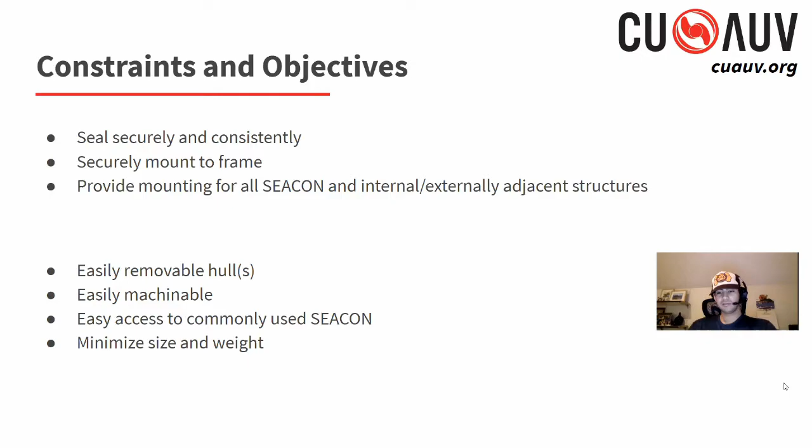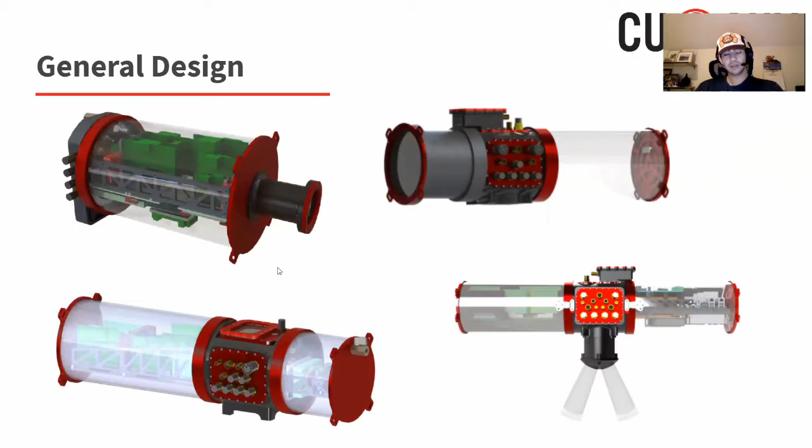And there's also these SEACON panels, which have those spots for the SEACON so the wires can branch off to various locations on the sub. In this iteration, there was a camera included. This one, the camera was also included, hence a clear end cap. But then you can see in these three, actually, the cantilevered racks and computers are here as well.

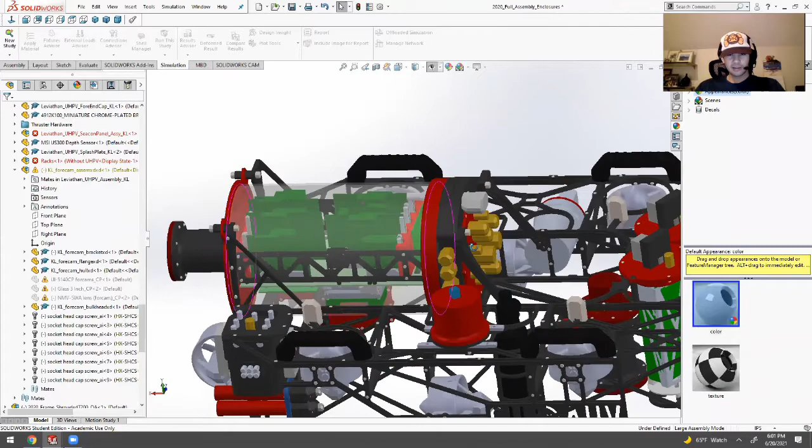So transitioning to CAD, I loaded up our most recent vehicle here. Let's see. So you can see the context in which this UHPV sits. So it's mounted in the back. These two tabs, kind of hard to see, but there's two things that brace from the back. Oh, I zoomed out.

You can see the SEACON panel here, pressure relief valve, cantilevered rack system. And then there's a camera here, and then there's these tabs which secure it in the front. And so this whole red portion is free to slide. The red and translucent portion is free to slide in and out and be mounted on these tabs. So the racks always stay in place on this back black part.

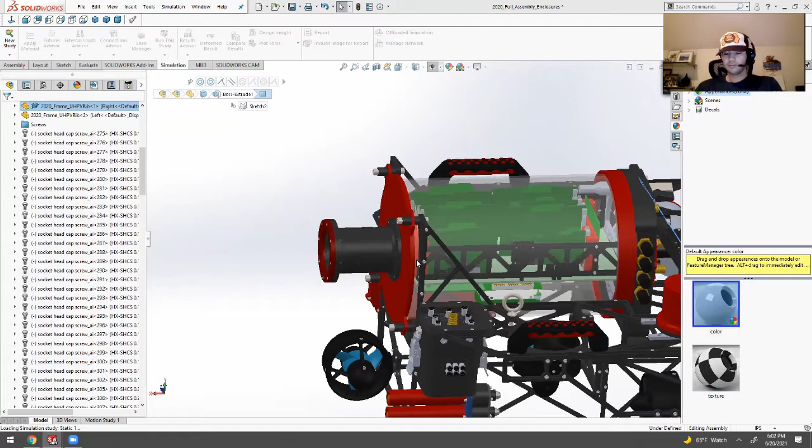So I can open up this one just to show more specifically what we've got. So we have, let's see. So here's the computer, here's the cantilevered rack portion, pressure relief valve, SEACON, call this the cap, collar, hull, end cap, and camera.

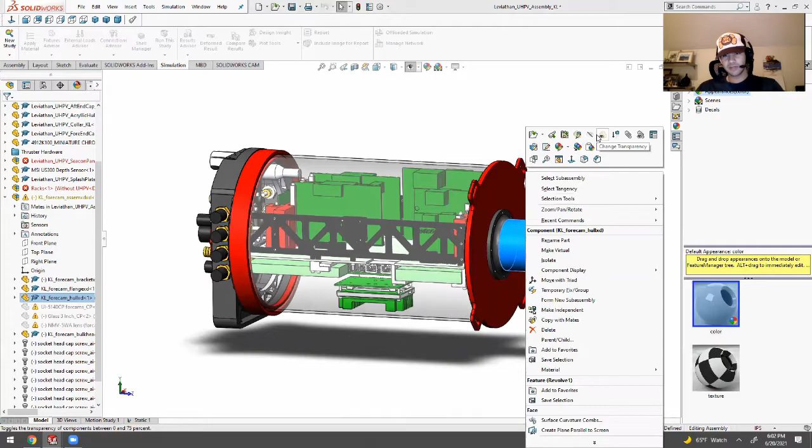You can see the camera in this iteration is mounted on a bracket. So the camera is not modeled right now, but there is a bracket that sticks out of here and it provides a mounting spot for the camera. So that means one less SEACON coming out of the side because the wire can go directly to the back plane.

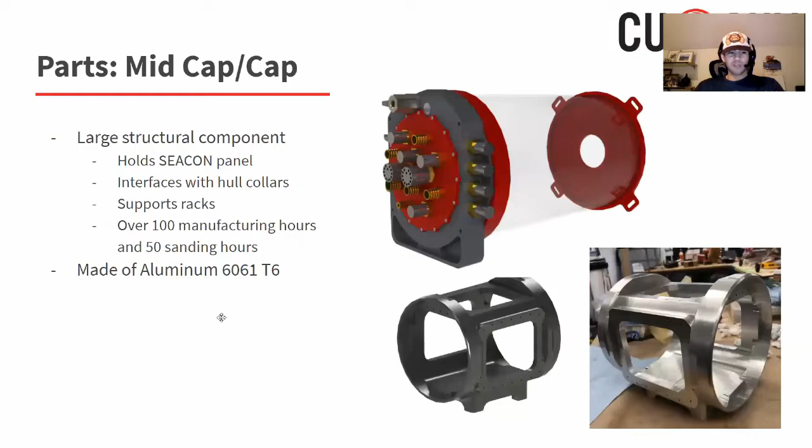So just to go over the parts briefly, the mid-cap / cap is basically the largest structural component. It holds a SEACON panel, interfaces with the hulls, collars, supports the racks. In some of these big versions, it took about 100 manufacturing hours and 50 sanding hours. So from year to year, if there's a part being reused by us, it's probably going to be the mid-cap.

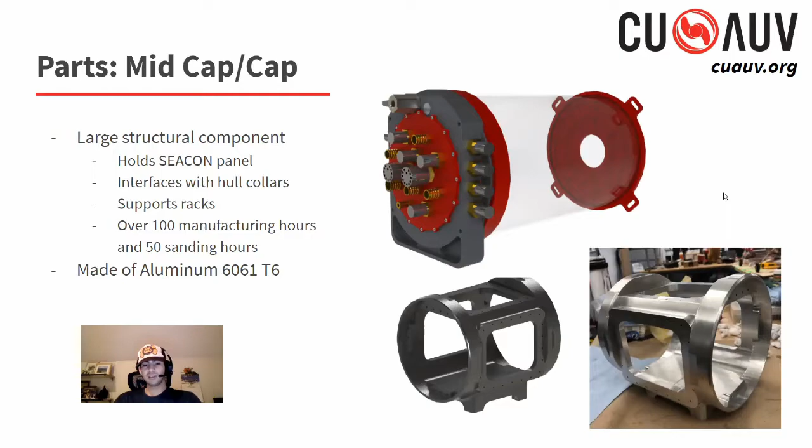It's always made of aluminum 6061 T6. Just to hit tolerances, we do everything in-house. So cheap and easy to machine, basically. The hulls are made of just acrylic tubes. They interface with the collars and the end caps. They're clear, which helps us see the electrical boards without taking everything apart.

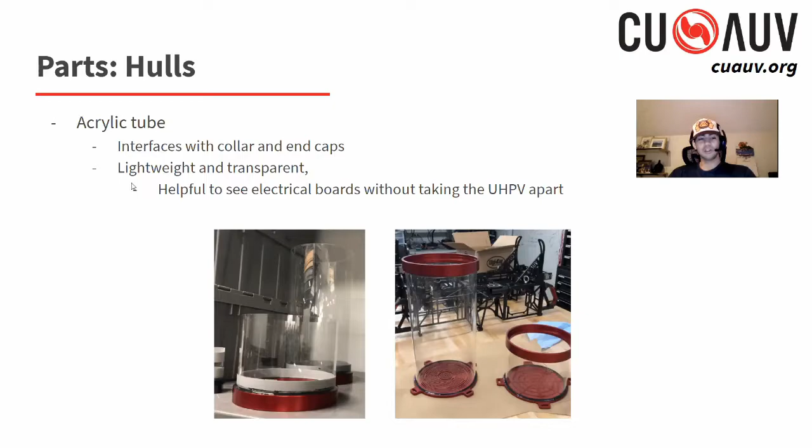The biggest challenge with these is since they're thin and not easy to machine reliably, we have to interface metal to create meaningful seals to interface with other metal parts. So I'll go through that quickly here, but the end cap is just the part that has the tabs on it that's secured to the frame.

And we actually do epoxy right here. So there's an adhesive that makes a watertight seal and makes this portion one entire unit. And there's also commonly weight savings or heat sinks, depending on year to year, that are put on the front on this side.

So the collar is the part right here that I just showed, and right here is also epoxied. So effectively, that whole portion becomes one unit, and there's a watertight seal right here and here caused by that adhesive. And if you look very closely, there's a groove for an O-ring to be seated.

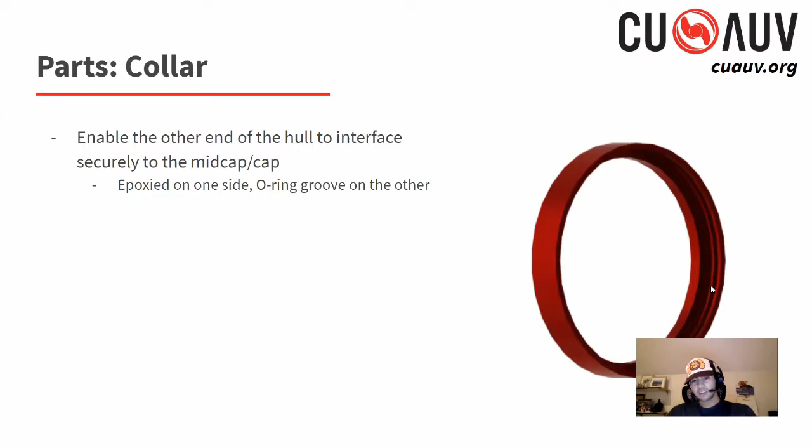So an O-ring is a rubber, almost like a gasket, where it's placed within this groove. And when we push the hull on, so when we push it in this way, basically the rubber is compressed along with the metal, and it fills the empty space and creates a watertight seal.

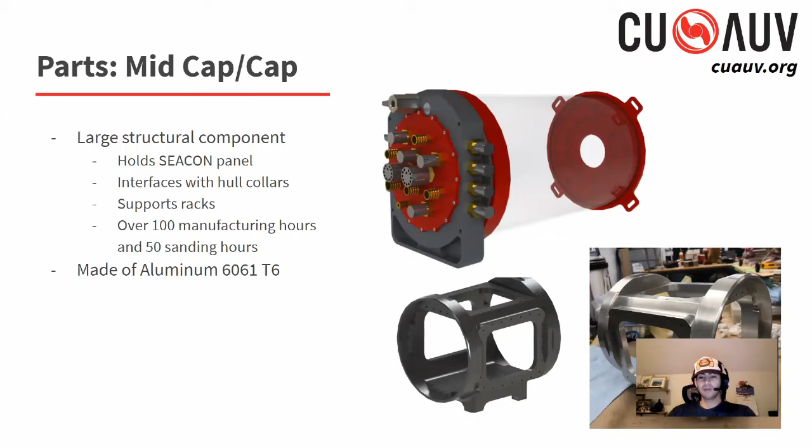So to do that, we have to hit really reliable tolerances, 0.003 of an inch. So that's why we take our tolerances so seriously and our machining so seriously. So yeah, pretty simple parts so far.

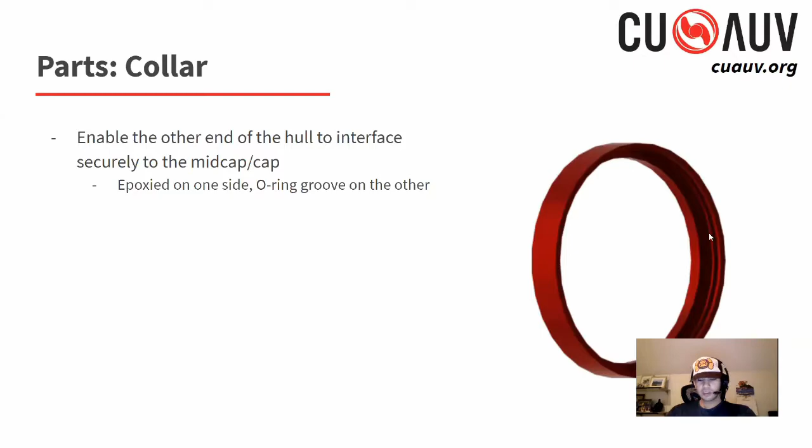SEACON panel, a little more complicated. It also has an O-ring groove, which isn't pictured, but it's on the back sort of. It fits sort of into the mid cap, or in other iterations, like we can go back to here, there's sort of more directly on the side of the cap, and then there's a more proper SEACON panel there.

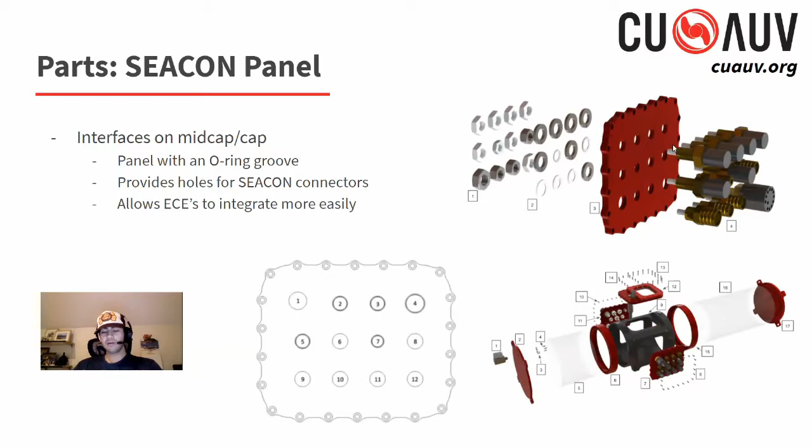But basically, we have various numbers of SEACONs of different kinds, and there's a washer and a nut on the back. And basically, this portion could have just been included in the mid cap, but to allow ECEs to integrate and crimp all the cables more easily, we just do a separate panel with an O-ring that gets compressed onto the side of the mid cap.

So just a quick structural recap. In this iteration, which is one of the mid caps we're reusing, here's the mid cap, 2 SEACON panels, 2 collars, 2 hulls, 2 end caps, pressure relief valve. And in this iteration, we actually had an LCD screen, so we could see stuff from above. Just another thing that we added.

So just some unique features, sort of recapping stuff that I didn't talk about. Sealing, we always use O-rings. Very reliable, very reasonably expensive. Easy to hit the tolerances if you're using a CNC. Manual machining, it's a little bit harder, but still within reason. So we do about 0.003 of an inch, like I said.

The UHPV is also vacuumed each time it's resealed, so that's why we have the pressure relief valve. We pull a vacuum and create a semi-vacuumed environment inside. So hopefully if there was any leak that actually propagated, the vacuum would cause the water to be pushed out instead of initially pushed in. That's partially why we have this pressure relief valve right in the back.

Material-wise, we use aluminum mainly for everything. It's just easy to machine, high mechanical properties, hit the tolerances like I talked about. And acrylic is mainly for serviceability, so we can evaluate the electrical system without opening everything up. It's also cheap, lightweight.

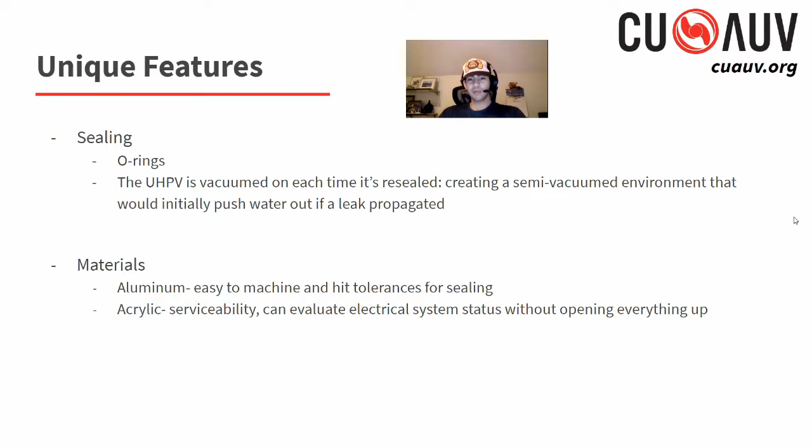Shape-wise, we tend to do cylindrical hulls. It's hydrodynamic. It's also easy to get the stock. So we can do stuff on the lathe if we have to. We can do stuff on the CNC. And then it also interfaces really well with a circular O-ring.

So you can buy O-rings, or you can sort of manipulate O-rings to fit any profile, but they're circles already, so it's easy to size them and fit them with circular O-rings. So that's another sort of motivation for the cylindrical shape.

Placement, we try to have them high up, easy to see, remove and assemble. So if I could go back to the CAD, the hull in the UHPV had a pretty dedicated spot where you could pull everything in and out with no obstruction.

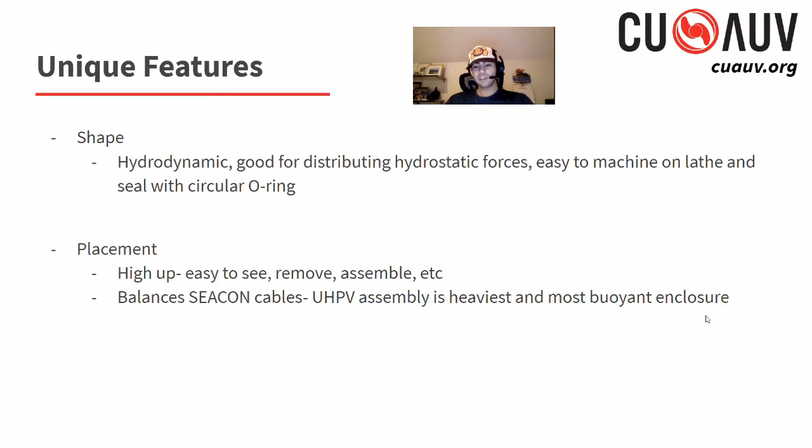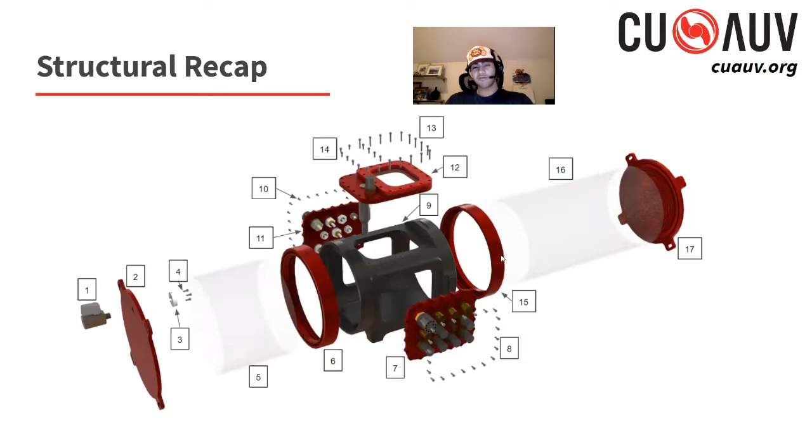And then also to balance the SEACON cables, the UHPV is the heaviest and most buoyant enclosure at the same time. So if I go back, you can imagine a big mass of cables here and here, and then these 2 large volumes, which have pretty small mass because they're mostly filled with air, at least relative to their volume. So these 2 parts are very buoyant right here, and these 2 parts are very heavy.

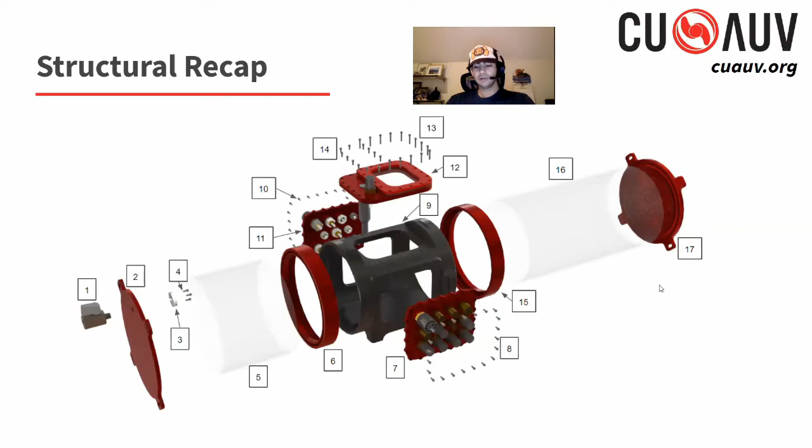So making sure our sub is balanced so it doesn't have to have too much trimming or weight or foam added anywhere is also kind of crucial to the placement of the UHPV. And then also what we enclose isn't entirely trivial within the UHPV. It kind of varies from year to year, sort of a function of balancing the UHPV's size.

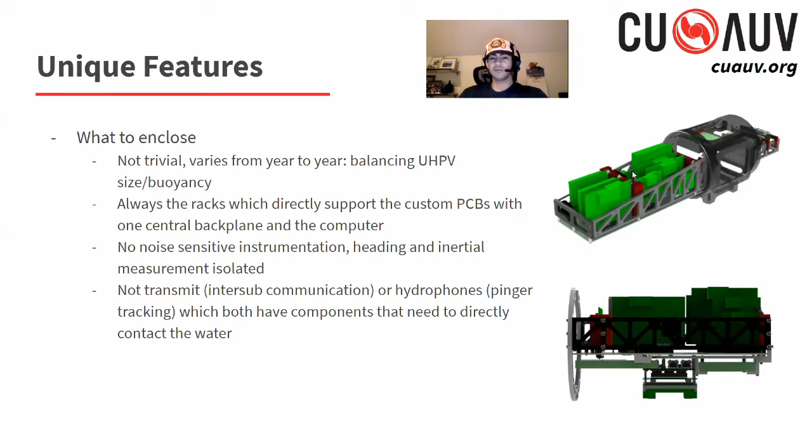So the first one was noise sensitive, so we isolate it in another enclosure. The other two actually have elements which need to be directly in contact with the water. So we also isolate those away from this main structure and connect everything via SEACON connectors. So it's not entirely trivial what we place in there; to optimize the performance of each sensor and component, we place them appropriately.